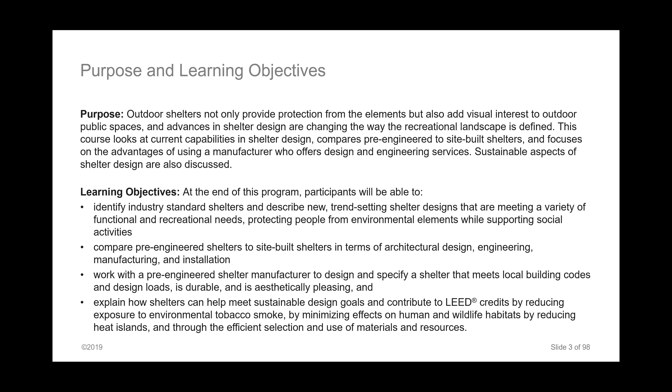This is done by reducing exposure to environmental tobacco smoke, by minimizing effects on human and wildlife habitats through reducing heat islands, and through the efficient selection and use of materials and resources. So we're going to look at some types of shelters.

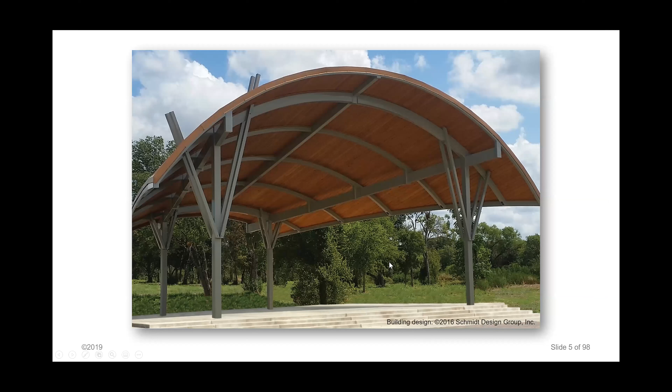A well-designed shelter can be a focal point in an outdoor space, providing a safe, comfortable, and shaded area for the community to gather. Be it a park or playground, athletic field or golf course, or an outdoor market or restaurant, there are shelter solutions available to meet the design and functional goals of the project.

Here you can see a lot of the standard type of shelters that you'll find throughout the market, made by all of the different shelter manufacturers.

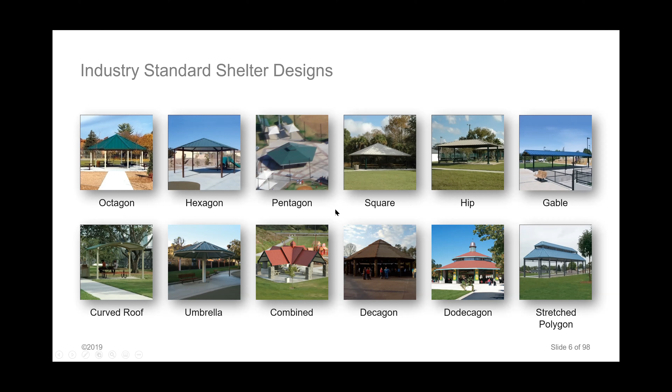Industry standard shelters, as I just showed you, traditional shelters and gazebos grace outdoor spaces across the country. Most shelter manufacturers offer variations of these common shelter types in an array of sizes and materials and a range of prices. But then there are other types of shelters that our company's been working with, and some of the others as well. These are more cutting edge.

While common off-the-shelf standard shelters fit the plan for most recreational settings, innovative ideas, some of which are pictured, have been introduced and are creating trends in park design.

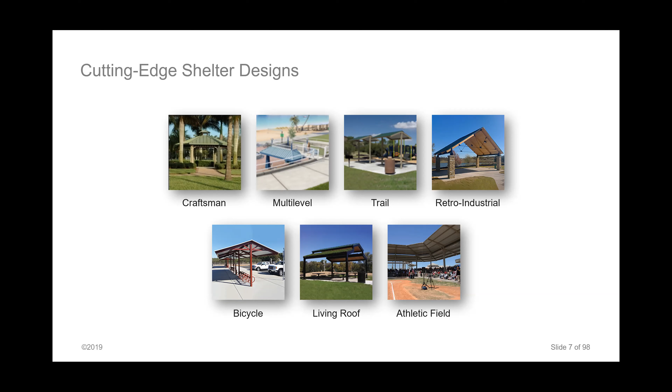A dual pitch shelter has two sloped roof surfaces. A gable roof is a simple dual pitch shelter in that it has two sloped surfaces that create a peak. Other dual pitched roofs are structures where there are two different pitches in a slope or two opposing monoslopes at different roof pitches.

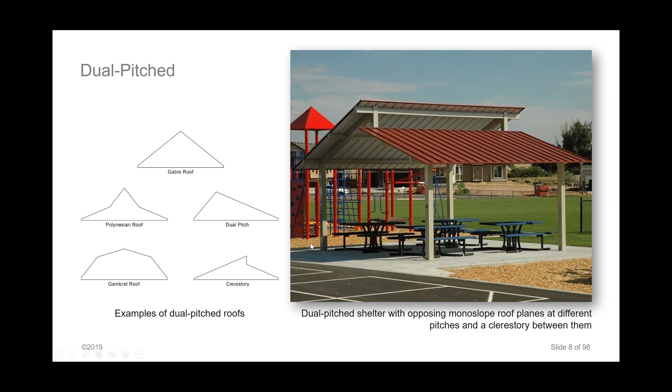According to the Dictionary of Architecture and Construction by McGraw-Hill, 1993, a clerestory is defined as an upper zone of wall pierced with windows that admit light to the center of a lofty room. Clerestory shelters are a variation of that concept in that they have two roof tiers with a sizable space between them that allows light into the center of the structure. These are much like barns and manufacturing buildings that were built with a monitor roof, which is shown at right.

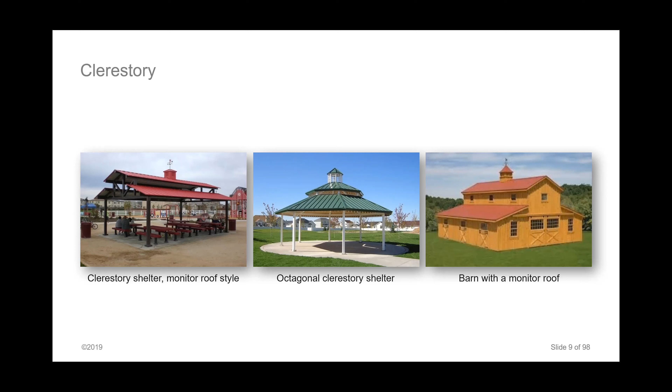A pergola is a garden structure with an open framed roof supported by regularly spaced columns. The definition has broadened to include any structure with a slatted, latticed, or otherwise partially open roof, which also includes garden arbors. They started being produced by pre-engineered steel shelter companies in the 1990s and are available in steel or wood or combinations of both. They can be fitted with fabric canopies to block or diffuse the overhead sunlight.

Living roof shelters combine a green roof product with a steel structure to create a cool and attractive shade space. An engineered roof fascia is designed to work with a modern green roof system. Structures can be fitted with irrigation to keep the green roof healthy and lush.

Flexible water lines can be fed through the steel framing members to the peak of the structure. At the roof, burying the water lines in the soil avoids unsightly lines in young plant trays and reduces the opportunity for vandalism on the system. Drainage is designed into the fascia system and can be taken to grade with a gutter and downspout.

Structures don't always have to only provide shelter, but as seen here, they can provide a view as well. Elevated platform shelters provide another level of usable space, serving as multifunctional structures. They can be fitted with lights, outlets, tables, and seating, and other amenities.

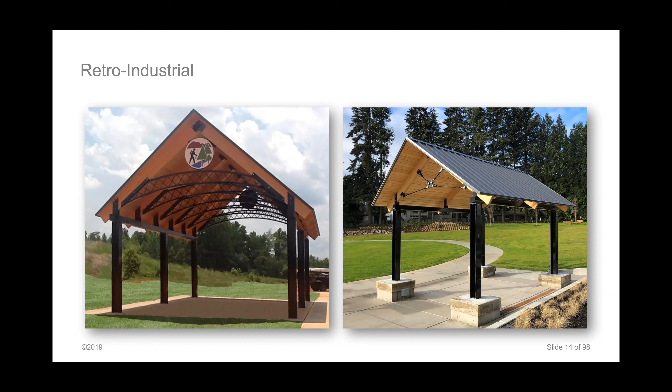Craftsman-style shelters were designed to fit into parks to match that style of architecture present in the homes of the neighborhoods.

In addition to providing shelter, structures can also perform specific functions. Athletic fields provide the opportunity for exercise and socialization in a community. Infrastructure provides protection from environmental elements and can also generate revenue.

The ancient amphitheaters of Greece and Rome are testament to the fact that outdoor theatric presentations have been part of life not only for centuries, but for millennia. Modern stage covers or bandshells continue to be built for outdoor presentations of all kinds. Musical and theatrical performances, public ceremonies, and community meetings are just a few of the uses for bandshells that can be built on flat ground as well as at the base of an amphitheater.

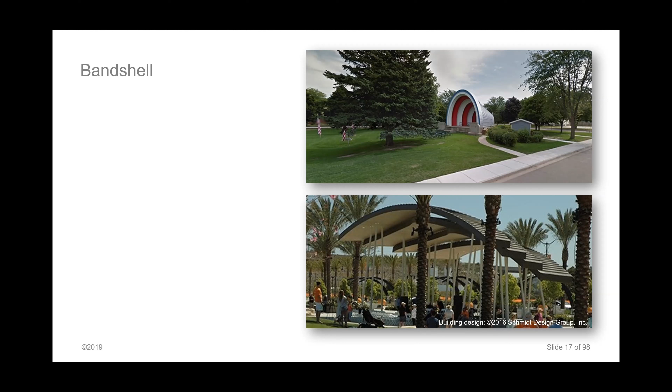The top image shows a bandshell in Campbell Park in Huron, South Dakota. It was constructed in cast concrete and covered with steel roofing, and is an example of early 20th century bandshell design. In contrast, the bottom image is that of a stage cover at Civita Park in San Diego, California, designed by Schmidt Design Group. The park opened in 2017.

Cycling has been enjoyed for nearly 200 years. Bike racks, lockers, and storage buildings have changed over the years to meet the ever-growing needs. Shelters can have attached or freestanding bicycle racks with either horizontal or vertical storage, and can be designed with or without wall enclosures.

Large free-span structures have been used to house carousels. Hexagons, octagons, decagons, and dodecagons in sizes up to 100 feet in diameter have been designed with an elevated eave height and/or a second tier to accommodate the height of the center post of the carousel.

Vented or glazed cupolas and clerestories can help let in light and let out heat. Typically, the shelter manufacturer will provide the frame, roof, and cupola, while the general contractor will provide the walls, windows, and doors.

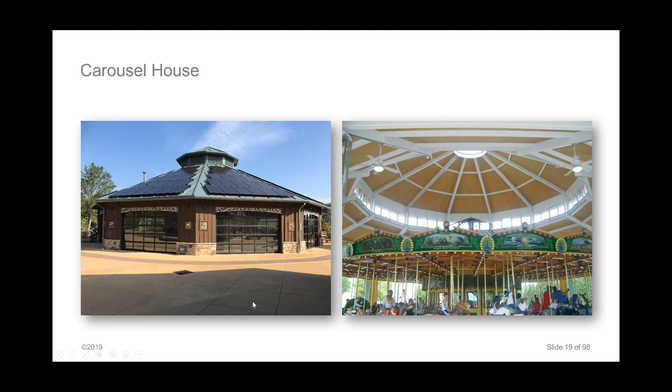Clock towers can accommodate a variety of clock sizes. They can be illuminated and provide automatic time control.

Many shelters are partially enclosed to house restrooms, concessions, and storage areas. Larger shelters can be enclosed for meeting spaces and community activity centers. Wall systems vary, but the most common method of construction is to erect the shelter and build the walls of the structure underneath the roof. Panelized wall systems are available, as well as timber wall systems that go up in the same way that milled log homes are built.

Farmers markets exist in many countries worldwide and offer farmers increased profits over selling to wholesalers, food processors, or large grocery retailers. They reflect the local culture and economy and help to maintain important social ties. Local businesses nearby also benefit from the increased traffic. Many towns and cities erect permanent shelters to house farmers markets, and these structures can also be used for other community activities.

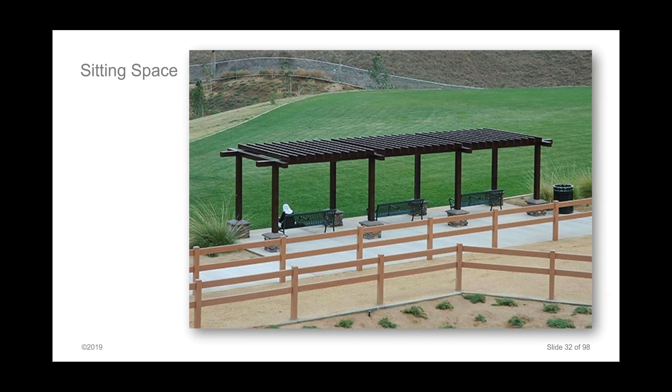Trail systems often need small, inexpensive shelters for waysides.

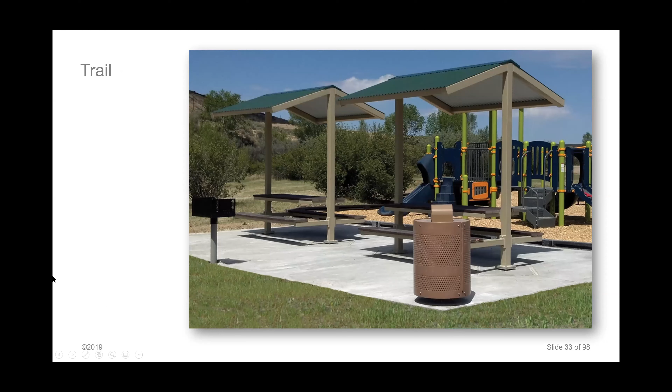One of the applications of open structures is a space for outdoor dining. Restaurants, vineyards, breweries, zoos, sports complexes, and more often offer outdoor seating.

Public fishing areas often provide a location to clean the catch. A small shelter is perfect for covering the fish cleaning station, which protects not only the fishermen, but also the equipment.

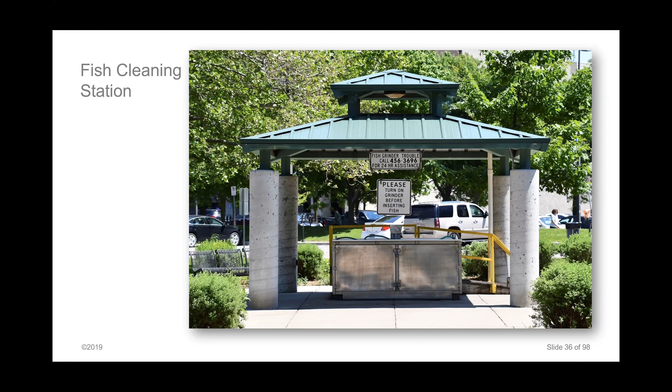So, what is pre-engineered? The term pre-engineered means construction of or employing prefabricated modules, according to the Merriam-Webster Dictionary. The pre-engineered concept started back in the early 60s, but didn't really take off until the 1980s with the metal building industry. Initially, pre-engineered buildings were made from off-the-shelf products that had been pre-designed.

The information was placed in tables for ease of use by the manufacturer. With the evolution of computers, tabulated design charts are no longer needed.

And what are alternatives to pre-engineered? The main alternative to pre-engineered structures are ones that are fabricated in the field from raw stock or site-built. This means that the sections are fabricated or connected in the field, generally utilizing a welded connection, but some site-built shelters can also use bolts.

Because the fabricated parts may be totally fabricated in the field, this has the potential to lead to quality issues. Most of the time, a steel fabricator will be hired to provide the parts fabricated to length.

The local fabricator is normally charged with developing the fabrication prints for the parts under the review of the structural engineer. These are generally two separate companies. The contractor and the design professional are ultimately responsible for the review and final quality of the products. So if the contract is not specific enough, there could be issues in this area, especially in small shelter designs.

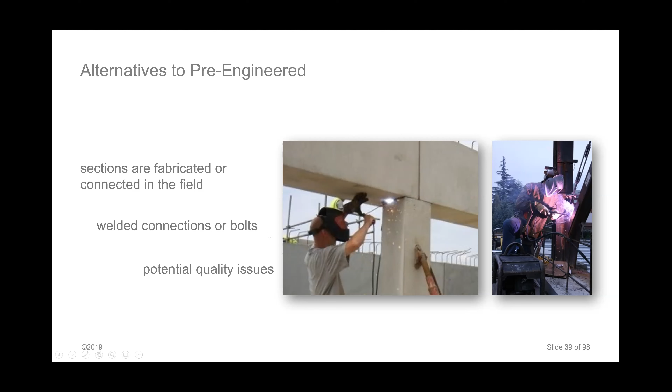Most of the pre-engineered shelter suppliers offer design and engineering capabilities. This design expertise allows for proper proportions and clean lines to be included in the designs, which are not always provided with conventionally framed and site-built structures.

This is applicable for standard offerings and, more importantly, for custom designed projects. The design expertise allows manufacturers to provide valuable insight on different applications for shelters and their locations.

The design services also help landscape architects to stay in control of shelter designs without having to provide all of the design work themselves. Most manufacturers will work with architects, providing design guidance and sketches for projects, and may provide this at little to no charge, a valuable design service for design professionals and their customers.

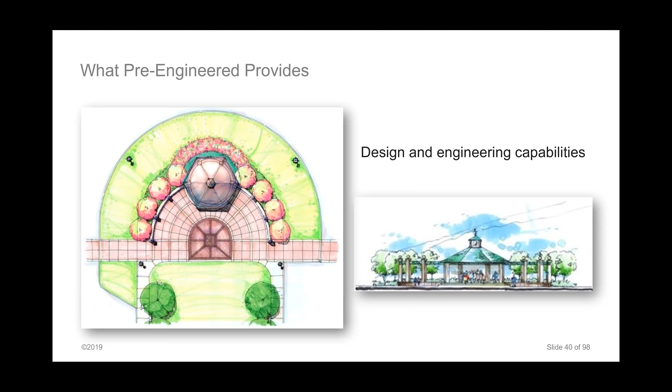The design and engineering functions provided by the pre-engineered supplier mean countless design visions can be realized, such as customized column designs in various formats, customized ornamentation for the project site, different roofing styles, modified roof pitches, accessories such as cupolas, column wraps, and high-end powder-coated finish systems.

The main advantage that a pre-engineered shelter system has over a site-built shelter is that the structure has been designed as a complete system rather than a combination of parts from several sources that are then fabricated to form a completed structure.

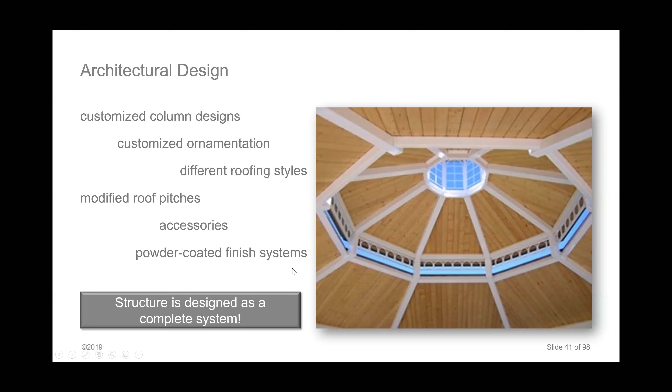The next advantage to using a pre-engineered shelter manufacturer is that they also provide the structural engineering for the created design. The manufacturer will either have an engineer on staff or they will hire an engineering firm to provide the structural engineering required for the specific design, a more expensive option and the only option for site-built structures.

Accomplishing this within the confines of the pre-engineered shelter manufacturer's own facility allows them to provide engineering that is not done in a vacuum. This means that the engineering is done in conjunction with the standard manufacturing practices developed for the products, thereby producing a more cost-effective design. In addition, having an in-house engineer speeds up the process. The engineering is normally done to the specific building code requirements for the project's location.

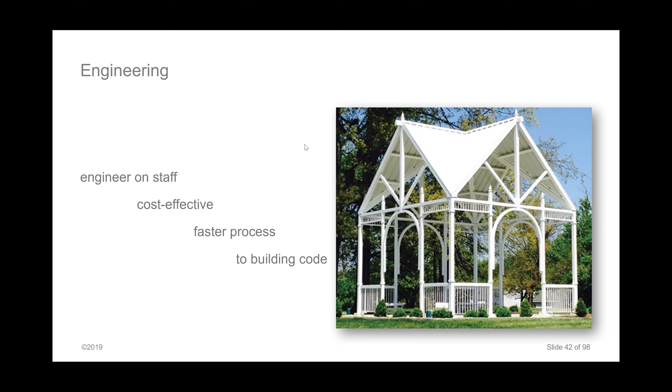In the past, manufacturers would design standards to meet certain loads. Often they had multiple load values for the standards, and a design would be picked that met the local code requirements. This was an inefficient practice, particularly in the use of the members, as some may have been oversized for the project site. Most pre-engineered shelter manufacturers design to the local governing building code for the size of the shelter desired. This is a better use of the steel framing than using pre-designed standards, as you only pay for the amount required.

This method provides a site-specific design for the shelter and its foundation.

Early in the pre-engineered shelter story, some manufacturers stocked certain sizes of shelters. Normal sizing was in 4-foot increments, starting at 12 feet. However, sizes in between the 4-foot increments were considered custom, and additional charges were applied. Currently, most pre-engineered shelter manufacturers have highly automated processes and can fabricate a shelter to any size required. It is possible to design, engineer, and fabricate whatever the budget will allow.

Shelter design is generally considered a standard offering, with many options available for customization, such as column styles and ornamentation. But since everything is engineered and made to order, all items have become standard. With the engineering and design fulfilled by the shelter manufacturer, the fit and finish of the shelters is superior to site-built shelters.

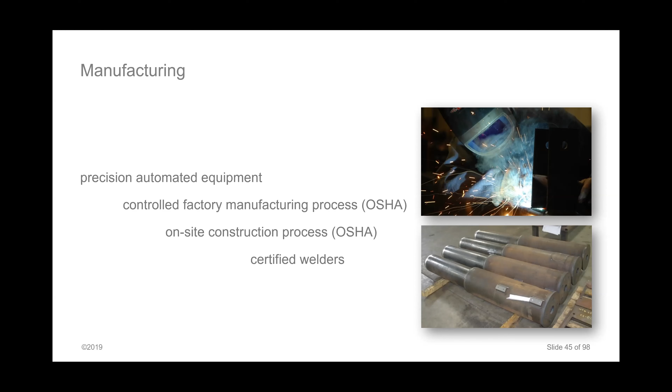A pre-engineered shelter manufacturer should offer precision equipment, automated computer numerical control, to provide the best quality in the shortest amount of time. They should offer a controlled factory manufacturing process and an on-site construction process that follow OSHA requirements for safety, and they offer certified welders.

Pre-engineered shelter manufacturers can provide a high-end factory-applied powder coat finish. Powder coating is a superior finish that cannot be applied in the field and performs better than any site-applied wet coat finish.

Manufacturers may provide corrosion protection through the use of primers applied to clean steel. Some use zinc-rich primers and some use an epoxy e-coat primer, similar to what auto manufacturers use on vehicles. The final color, in the form of a TGIC curing agent, triglycidyl isocyanurate polyester powder coating, is applied over the primer.

The coating is electrostatically applied and then cured onto the steel. A 4 to 6 mils powder coating is typical, with some manufacturers providing a coating thickness of 8 to 12 mils. Mil thickness is a common measurement in manufacturing—a mil is a unit of thickness equal to 1/1000th of an inch.

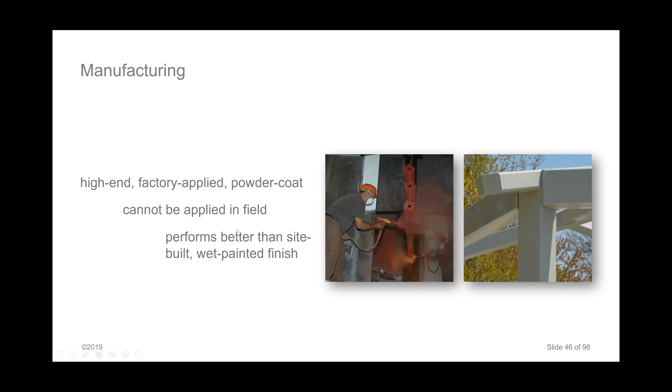With regard to installation, there's a big difference between pre-engineered and site-built structures. Most pre-engineered shelter manufacturers deliver the products banded together for easy shipment to the job site utilizing flatbed truck shipping. All pre-engineered structures utilize bolted connections for the main framing connections. This allows for ease of installation and straight connections. There is no field welding.

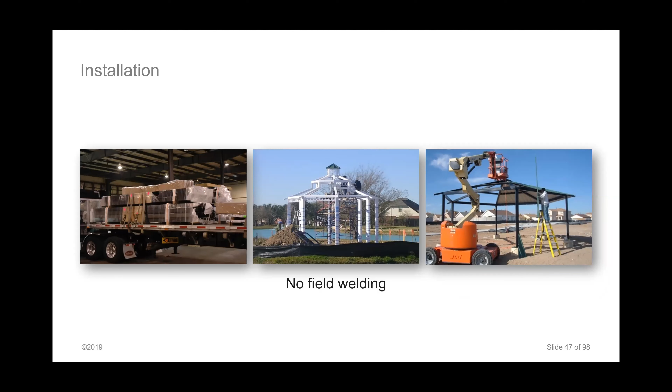All connection plates are fabricated in a quality-controlled factory setting, resulting in great precision in the locations of the holes. The bolted connections and pre-aligned holes afford relatively quick installation of the structural framing. Connections are normally welded for site-built shelters, which requires hiring welders who will have to work up on a lift, usually meaning higher welding costs than those for a factory setting.

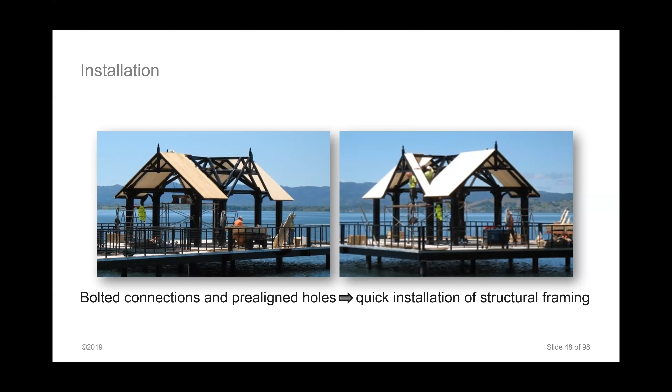Quick structural framing installation means more time can be spent on areas that require more finish work, the roofing and the trim. Manufacturers often provide pre-cut metal roof panels for shelter styles that have hip roofs, which again saves time in the field. The installation crew can install the panels without having to measure and cut them beforehand.

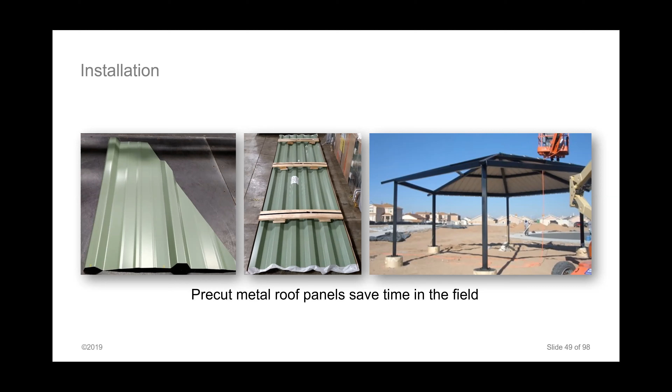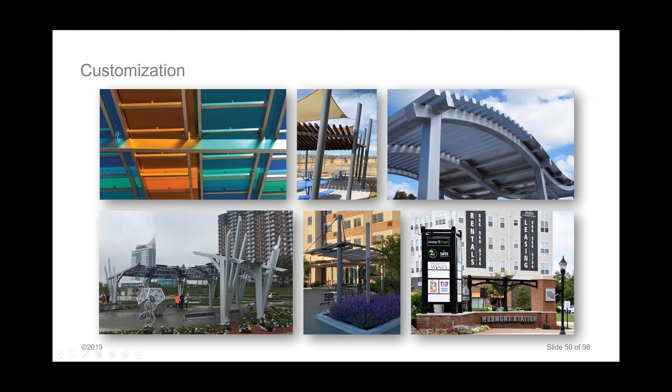So you see colored plexiglass, you see fabric and wood and steel combined, curved members, and all kinds of different settings. And here are some other custom design projects by shelter manufacturers.

Design is how you create a structure that is pleasing to the eye, and engineering makes sure it passes the building code. Without both, the shelter could either be safe and ugly or beautiful and dangerous. Work with a manufacturer who blends design and engineering to create shelters with structural integrity that are pleasing to the eye.

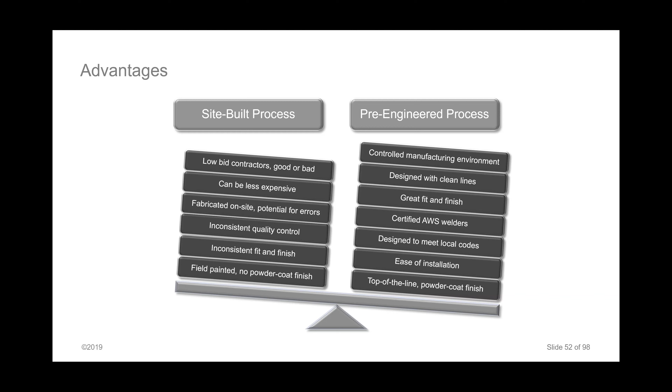And here's our first review question. What is the main advantage that a pre-engineered shelter system has over a site-built shelter?

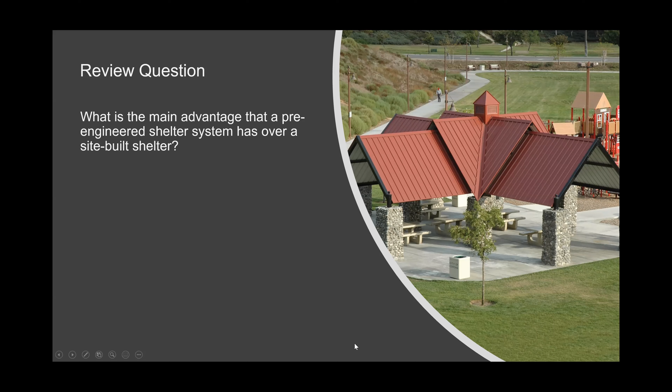The answer: the main advantage is that the pre-engineered shelter structure has been designed as a complete system, rather than a combination of parts from several sources that are then fabricated to form a completed structure.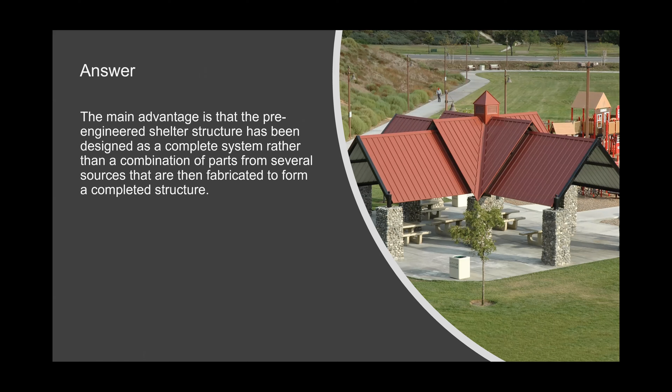Now we'll discuss some of the many elements to consider when designing and engineering a shelter.

There are aspects of good visual design that can be considered relative. Beauty is in the eye of the beholder, after all. Yet there are specific means by which an artist organizes a work of art, and we have those shown here.

The pattern or repetition is the regular arrangement of repeated shapes. Contrast is the juxtaposition of alternating textures or values to highlight their differences. Emphasis is a design element that becomes a focal point. Balance is the arrangement of elements to create the impression of equality in visual weight.

Proportion is the relation between elements with respect to size and quantity. Harmony is the sense that all elements form a coherent whole. And rhythm or movement is the systematic arrangement of elements that drive the eye to the focal point.

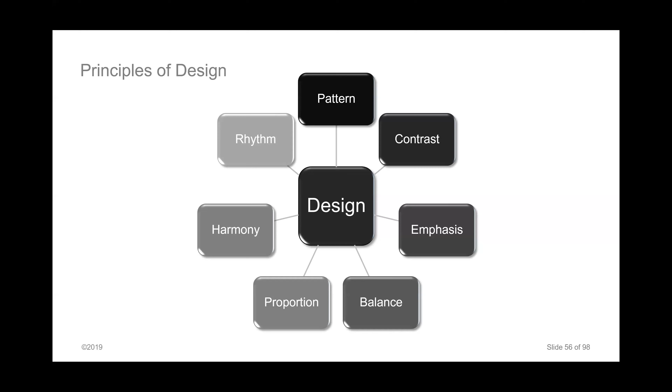These principles of design also come into play when creating an aesthetically pleasing shelter designed to achieve the desired intent, which in most cases is to invite people in.

Proportion and balance: the two elements illustrated in these photographs. In the photo on the left, the overhang on the upper tier is longer than the overhang on the lower tier, giving the shelter a top-heavy look. Also, the visual weight of the roof tier seems to demand larger columns with enough visual weight to carry them. The shelter in the photo on the right demonstrates the correct use of both of those design elements.

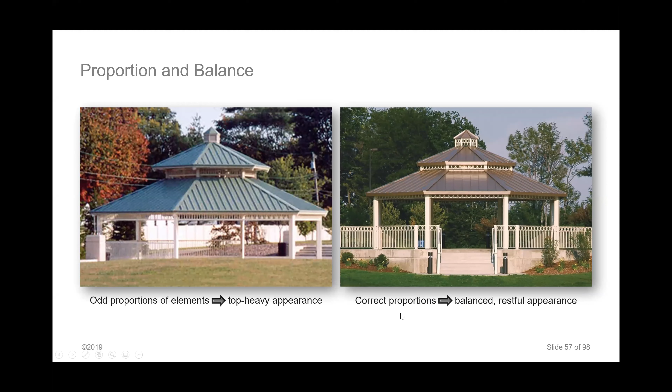Attention to detail is important not only in the design of the shelter, but also in the fabrication of its parts and the care taken during its construction. Fit and finish are important in the overall aesthetic appeal of a structure. Good design includes engineered connections that achieve the overall aesthetic and the required structural integrity.

Skilled fabricators know how to produce parts that fit together tightly to form a unified structure. Trained and licensed contractors are required to install the structure according to the manufacturer's installation instructions. Attention to detail is required from concept to installation to produce a durable and attractive structure that will provide service for decades.

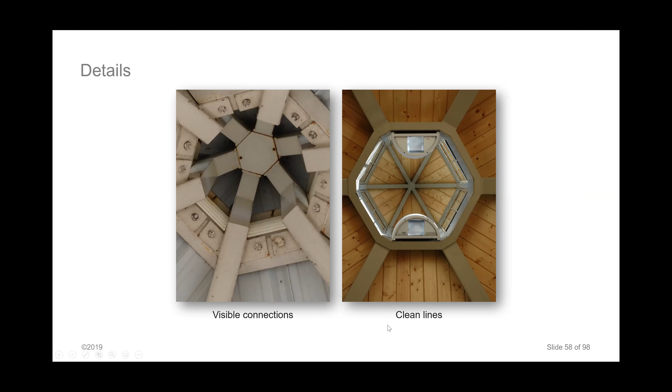There are many options and accessories available to consider. For example, industry standard shelters are available in multiple roof tier configurations. Depending on the manufacturer, 2 tiers are usually available on all shelters, while 3 tiers are available on shelters over 40 feet. The photos show the difference between a vented roof option, which is the top photo, and a clerestory roof option. The clerestory roof option offers the room to install ornamental rails, louvered vents, or windows.

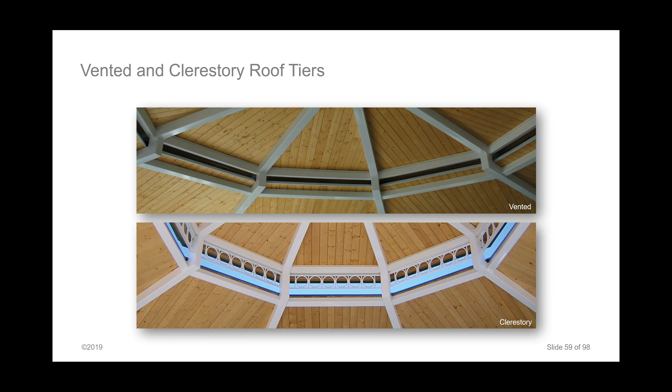Check the manufacturer's offerings for standard and custom designs for options and accessories, such as those pictured, columns and ornamentation, as we discussed earlier.

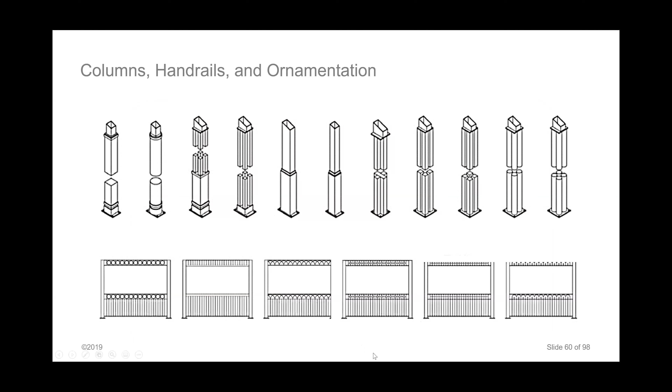Cupolas are available in a wide range of standard sizes and styles. Manufacturers may also offer custom sizes and styles. Weather vanes can be used to adorn the peak of a cupola and should be available in both standard and custom options.

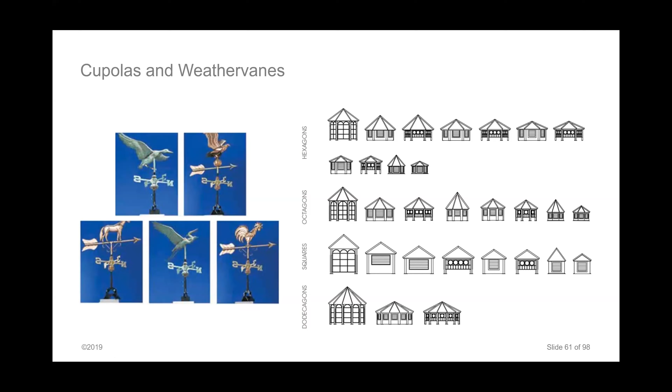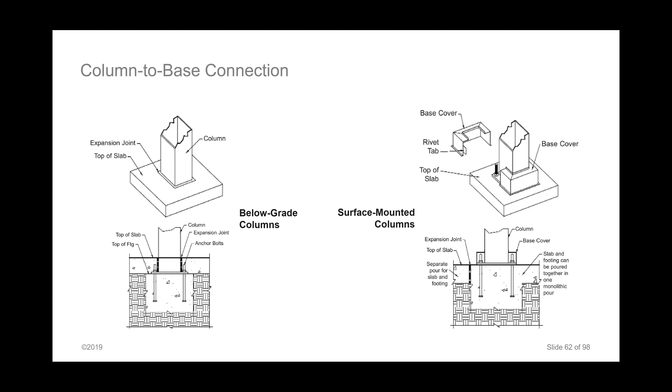Most pre-engineered shelter manufacturers have a standard shelter offering, usually including some version of a square, hexagon, octagon, rectangular gable, rectangular hip, and curved roof rectangles. Other standard products may include gazebo designs, pergolas, mini shelters, and kiosks.

Typically offered in 4 or 6 foot increments with a standard roof pitch, they can now be ordered in 1 foot increments without incurring custom design charges.

Options and accessories, as discussed, can be added to modify the shelter's appearance and function. Eave heights and roof pitches can be raised or lowered to suit the design intent. Benches and wall panels can be added to the frame as required. Manufacturers may offer some type of finish modification, a solar lighting package, or lightning protection.

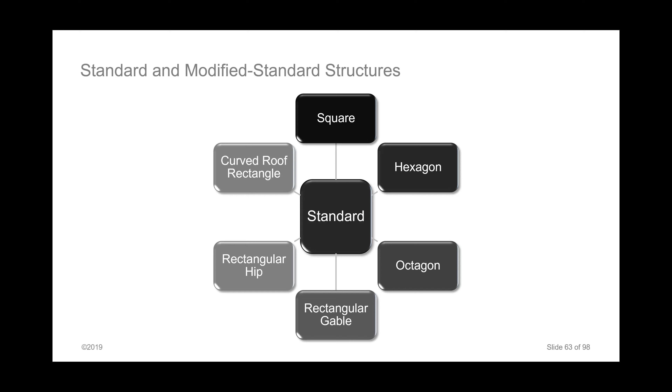One of the questions most often addressed to manufacturers is, do you do custom buildings? Producing custom shelters and other structures requires a certain level of expertise not held by all manufacturers. Be sure to inquire about those capabilities if you approach a manufacturer with a design not found in their product offering. Often with custom structure design, it is best to involve the manufacturer's design and engineering personnel in the early stages of design in order to achieve the greatest cost savings.

A standard roof option is 24 gauge Galvalume roof panels with a PVDF resin coating, such as Kynar 500. Ribbed panels can be pre-cut by the manufacturer and may require minor field adjustments for proper fit. Standing seam roofing is another option and may be supplied uncut to be cut in the field by the installer. Matching trim and 26 gauge Galvalume and fasteners may also be provided by the manufacturer.

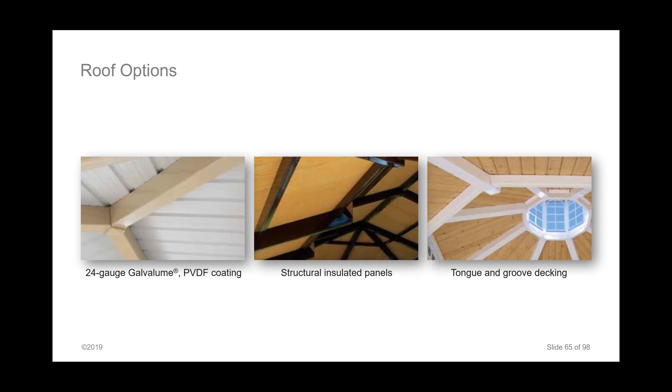And on the right, 2x6 and 2x8 tongue and groove decking are also used, with the most common species being southern yellow pine, western red cedar, and western lodgepole pine.

Shelters with structural insulated panel or tongue and groove roof decks require finished roofing materials. While this can be any roofing material available to the building trades, most manufacturers offer pre-cut painted metal, steel, or aluminum roofing panels in a variety of rolled configurations, such as ribbed panel, corrugated, standing seam, and others.

Also offered are shingle packages in fiberglass or sawn cedar, as well as tile roofing in a variety of styles.

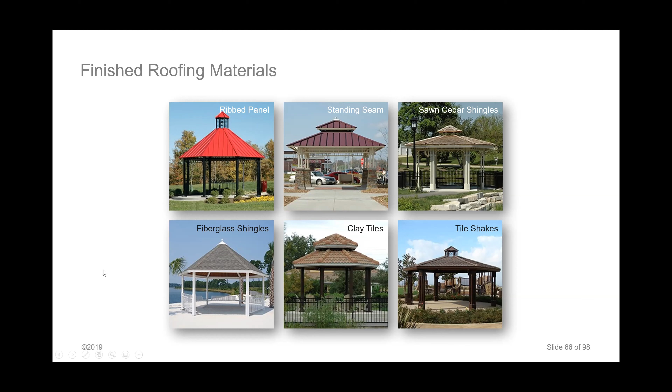For steel finishes, you can get prime painted finishes that are factory priming that protects the steel components from corrosion throughout the shipping and erection process. The steel is cleaned to remove loose mill scale, loose rust, loose paint, and other loose detrimental foreign matter. The clean steel will then be prime painted with a quick dry, lead and chromate-free alkyd primer. Finish painting in the field is required.

For hot dip galvanized finishes, the process produces a zinc coating on steel products by immersion of the material in a bath of molten zinc metal. The steel to be coated is first cleaned to remove all oils, greases, soils, mill scale, and rust. Because galvanized steel requires no maintenance for decades, its use in public construction is an efficient use of public funds.

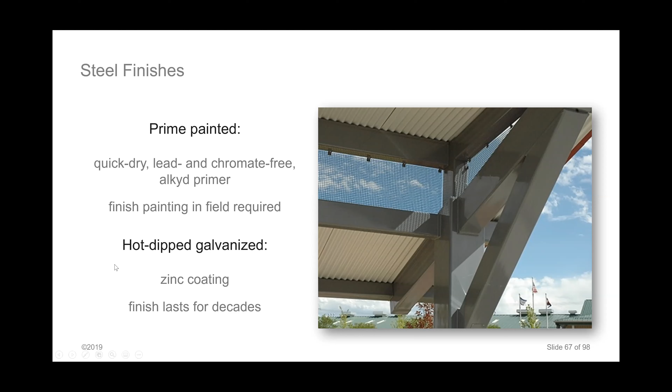The E-coat and powder coat finish is a premier steel coating and is a combination of liquid epoxy primer and 2 coats of TGIC polyester powder coating. The process has 5 steps. First, the steel is shot blasted to the specification of SSPC SP10, shot blasted to near white condition, removing all oil residue, mill scale, weld spatter, and slag.

The steel is then immersed in zinc phosphate in an 8-stage pretreatment process. Then it is immersed in an electrostatically applied liquid epoxy and coated to a uniform 0.7 to 0.9 mils. This E-coat totally encapsulates the part, preventing rust.

Following that, a double coat of TGIC polyester powder is applied, 1 coat of color, and 1 clear coating for a final finish that is 8 to 12 mils thick. Finally, all materials are inspected to meet 100% coating, proper cure, film thickness, and impact resistance.

In highly corrosive environments such as coastal areas, a hot-dipped zinc galvanizing prior to applying a finish coat is recommended. This may produce a slightly rougher finish once coated, but will provide added protection against corrosion.

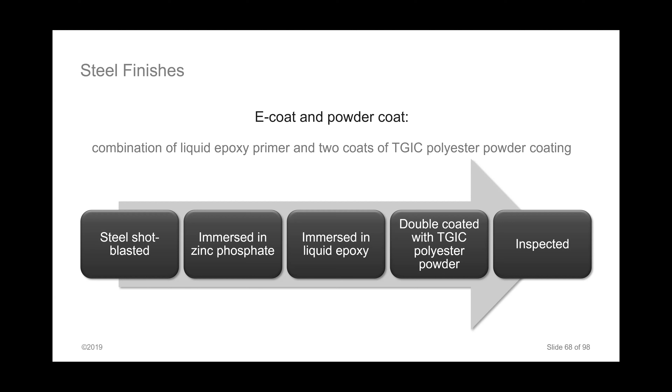Under engineering considerations, design must meet the local building code requirements where the shelter will be installed. There are a number of building design loads to consider.

Dead load is the total weight of the structure's installed components. Collateral load is additional dead load applied to the structure, accounting for additional items that will be attached to the structure, such as sprinklers and lighting. This is in addition to the dead load.

Live load is the minimum downward acting load that a shelter must be designed for per the local building codes, 20 pounds per square foot.

Ground snow load is the amount of snow that will accumulate on the ground, specified by the local building department or ground snow load maps for the area. This is used to determine the roof snow load, which is the downward acting force on the shelter's roof determined by a percentage of the ground snow load that will accumulate on the roof.

Wind loads include both lateral and uplift load. Lateral, or racking load, is the horizontal load that pushes and pulls on the structure based on the wind's direction. Uplift load is created when wind flows over the roof and under the roof on an open structure. The flowing over the roof creates suction or uplift on the roof, and the flowing under the roof creates upward pressure on the bottom of the roof. Essentially, open shelters are like large airplane wings.

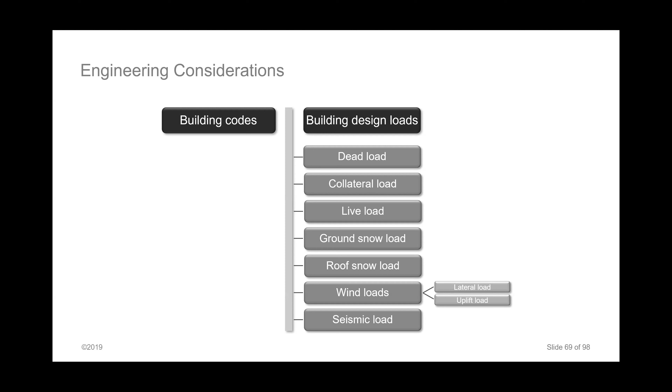All connections used in the structure are designed to be bolted together using high-strength A325 bolts. Connections are made in such a manner that the bolts cannot be seen once the connection is fully tightened.

A permit is required from the local building department before installation of the foundation, and the subsequent installation of the structure itself can begin. The permit is granted once the engineering calculations and drawings for the structure are reviewed and approved by the building department.

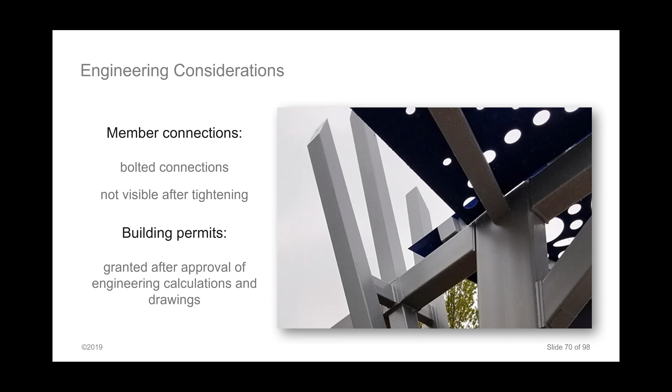Our second review question: what type of finish is recommended for highly corrosive environments?

You can hear the dun, dun, dun in the back.

In highly corrosive environments such as coastal areas, a hot-dipped zinc galvanizing prior to applying a final finish is recommended. This may produce a slightly rougher finish once coated, but will provide added protection against corrosion.

And now we'll look at how the design process works.

In the initial consultation, you will research shelter products and manufacturers and formulate a design concept. The architect or designer can meet with a shelter manufacturer, or may even be able to submit an online quote request.

The manufacturer will typically require information such as the project name, the project location by zip code, and shelter information, which is the minimum information needed: style, size, roof type, roof pitch, and any additional information such as drawings, specs, sketches, or custom components. A quote can be given if an existing design meets the project design criteria.

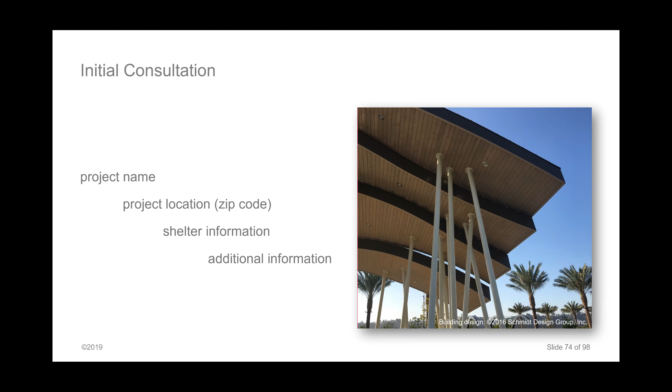If no design exists that meets all the criteria, the manufacturer will perform calculations based on the criteria and create the design. They will create a preliminary drawing, develop a material takeoff list of materials with quantities and types, such as specific grades of steel required to build the structure, and create a preliminary footing design.

Preliminary engineering involves reviewing the building information, searching for design loads based on zip code, creating a wireframe, selecting member sizes and anchor layout, and sending to detailers for drawings.

Once engineering, drawing, material takeoff, and footing design have been completed, a quote can be supplied. If revisions are required, the process is repeated until the design is approved and the final quote is given.

Why is that not changing? Oh, okay.

Final engineering typically comes when there's an order, and that involves retrieving the building design loads from the governing local entity, creating the model, selecting member sizes and design connections, reviewing the soils report if provided and designing footings, and then sending back to the detailers.

A 3D model of the shelter is created and used to formulate a submittal package with design information, foundation detail, member and bolt sizes, and connection details for the frame and roofing. Typically, a review is done by another detailer, and a final review is done by the engineer. The submittal package is then sent for approval.

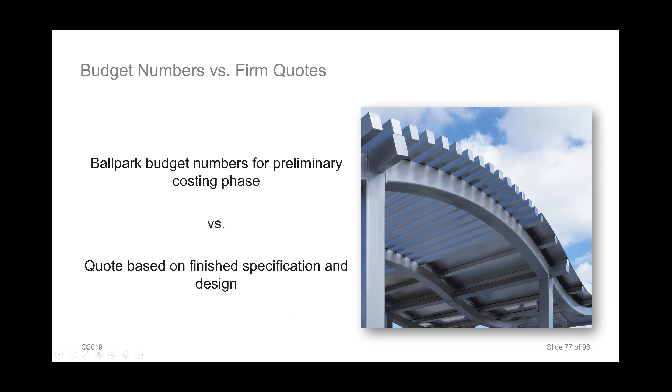Manufacturers typically provide some form of specification that can be used in the bid documents for a new project. One of the most widely used specification systems in the US and Canada is MasterFormat, published by Construction Specifications Institute (CSI) and Construction Specifications Canada (CSC).

Once the submittal is approved and the fabrication process begins, it will take about 8 to 10 weeks. Anchor bolts can often be shipped within 1 week after fabrication approval is received. For fabrication print development, a 3D model is used to create fabrication submittal prints for approval. Once the submittals are approved, the model is used to create individual part prints for each subassembly part included in the model. The fabricator will detail tube, plate, and fastener sizes, create roof and trim kits, and count fasteners for both the frame and roofing. A bill of materials is created and a final review is performed before releasing the print to fabrication.

The fabricator will perform material takeoffs, create a cut list, check inventory for stock, send order lists to purchasing, and schedule each step of the manufacturing process with assigned completion dates. For frame finishing, steel frame components are finished according to the order, E-coated, powder coated, prime painted, or galvanized, which takes about 10 working days.

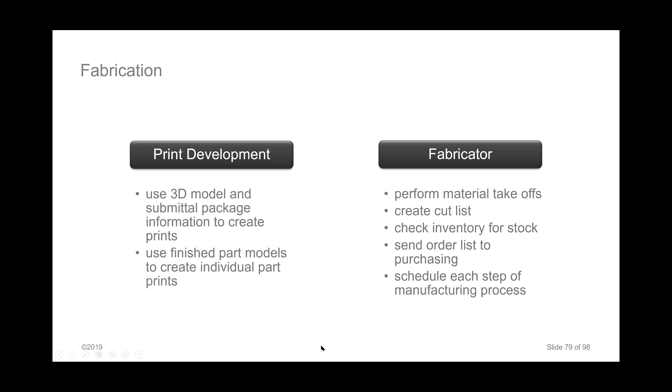Once the frame components are finished, a shipping date is arranged, the materials are delivered to the job site, and installation can begin. Most manufacturers' representatives are either licensed contractors themselves or work regularly with one or more contractors who can perform the installation of a shelter structure.

Specifications normally state that the installer is to be experienced in the building trades. They can include excavation, concrete foundation and flat work, steel or wood frame erection, carpentry, roofing, masonry, and sheet metal work. Construction timelines vary from project to project. Typically, a 30-foot shelter can be erected on finished footings by a 3-person crew in less than a week.

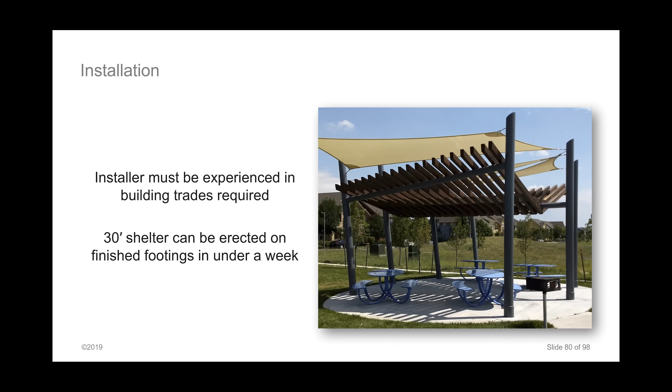So how can shelters fit into green design practices? Design and construction practices that significantly reduce or eliminate the negative impact of buildings on the environment and building occupants are called green or sustainable design. Loosely defined, green building is a collection of land use, building design, and construction strategies designed to protect the environment, reduce energy consumption, and promote occupant health. The goal of sustainable design is the development of high-performance buildings that improve local and global communities.

Shelters can contribute to the sustainable design objectives of a landscape project. The following slides outline their potential contributions to projects seeking LEED certification.

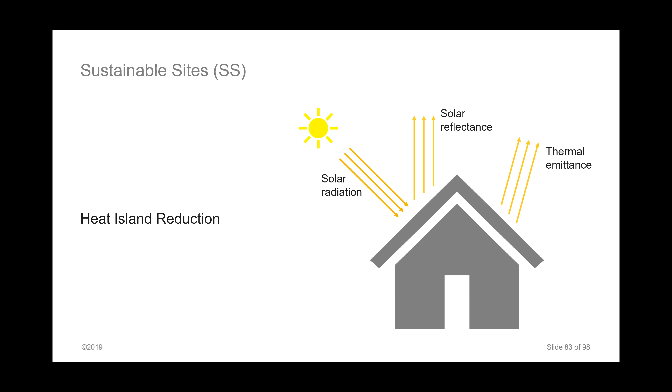The intent of the Renewable Energy Production Credit is to reduce the environmental and economic harms associated with fossil fuel energy by increasing self-supply of renewable energy. It requires the use of renewable energy systems to offset building energy costs. Shelter roofing materials can have integrated solar panels for energy production.

The intent of the Building Product Disclosure and Optimization Sourcing of Raw Materials Credit is to encourage the use of products and materials for which life cycle information is available and that have environmentally, economically, and socially preferable life cycle impacts, and to reward project teams for selecting products verified to have been extracted or sourced in a responsible manner.

Under option 1, leadership extraction practices, wood products must be certified by the Forest Stewardship Council or USGBC approved equivalent. Recycled content is the sum of post-consumer recycled content plus half the pre-consumer recycled content, based on cost. Wood shelter products can be supplied with FSC certification.

Steel is the world's most recycled material. The primary steel frames for a shelter can be made from recycled scrap generated from both consumer and industrial users. On a weighted average, this accounts for roughly half of the steel used in a typical shelter.

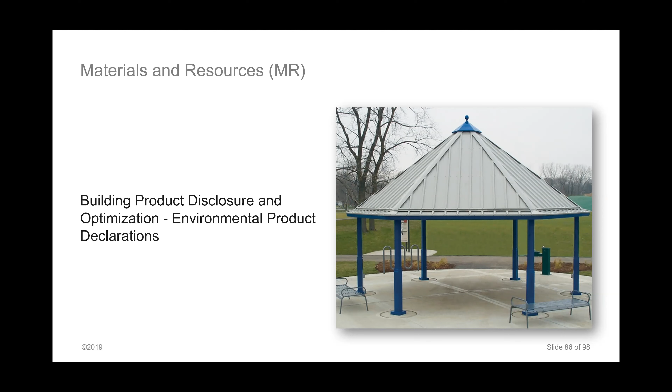The intent of the Construction and Demolition Waste Management Credit is to reduce construction and demolition waste disposed of in landfills and incineration facilities by recovering, reusing, and recycling materials. The requirement is to recycle and/or salvage non-hazardous construction and demolition materials. Calculations can be by weight or volume, but must be consistent throughout.

There are 2 paths under option 1, diversion. Path 1: divert at least 50% of the total construction and demolition material; diverted materials must include at least 3 material streams. Path 2: divert at least 75% of the total construction and demolition material; diverted materials must include at least 4 material streams.

Scrap material from shelter construction, as well as the packaging materials, can all be recycled.

The intent of the Environmental Tobacco Smoke Control Credit is to prevent or minimize exposure of building occupants, indoor surfaces, and ventilation air distribution systems to environmental tobacco smoke. The requirements are to prohibit smoking outside the building except in designated smoking areas, located at least 25 feet from all entries, outdoor air intakes, and operable windows, and to prohibit smoking outside the property line in spaces used for business purposes.

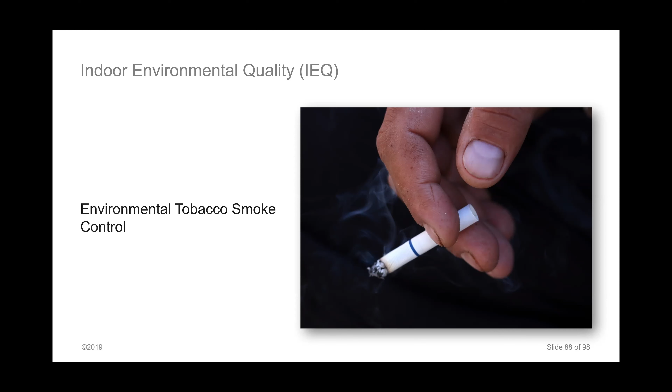In our last review question, how can shelters contribute to the LEED Sustainable Sites Heat Island Reduction Credit?

The answer is by using cool metal roofing or cool roofs, the heat island effect is reduced, which minimizes the impact on microclimate and human and wildlife habitat. Shelters are available that have metal roofing that meets the Solar Reflectance Index criteria for LEED and for the Energy Star Certified Roof Products program. Shelters are also available with vegetated roofing.

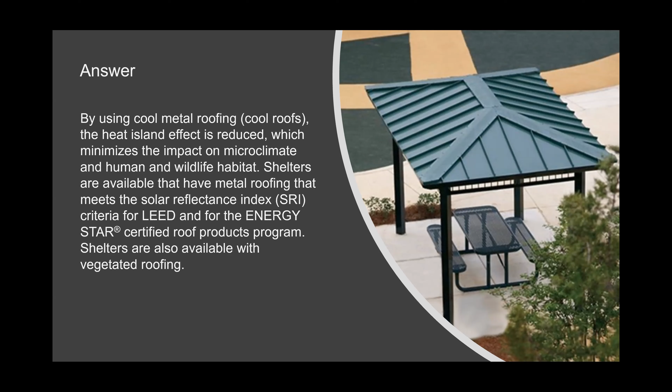And so we'll conclude with a few project profiles.

This project was initiated by the Rotary Club of Windsor 1918 in a request to the city of Windsor to help celebrate their 100th anniversary of service in that city. In August of 2016, the city of Windsor approved the intent for a plaza with sitting areas to provide shade for users of the Windsor Riverwalk at the Civic Terrace.

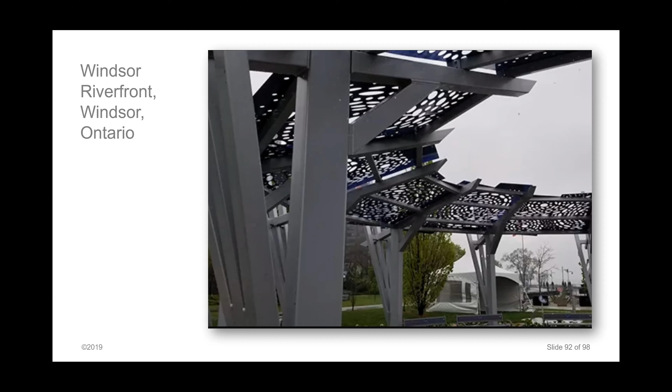The circular layout of the structure emulates the rotary wheel as deconstructed and reconstructed to symbolize the future of the Rotary organization. The trellis lies on the axis of the Civic Esplanade from City Hall at the south to the Detroit River. Looking up at the roof panels, one is reminded of Vincent van Gogh's painting, Starry Night. The roof panels are misaligned to indicate the future is never a predictable entity.

To lighten the structure, the columns were designed to arc outward to make the plaza space feel more open to the air. About the columns, the project designer Stefan Fidjuk said, "In honor of the First Nations who settled along the Bending River, today known as the Detroit River, the backsides of the columns form a series of tridents to symbolize the Ojibwe, Ottawa, and Potawatomi, who make up the people of the Three Fires. At night, the tridents are illuminated from the base to further appear like fires, burning as a symbol of the people of the Three Fires."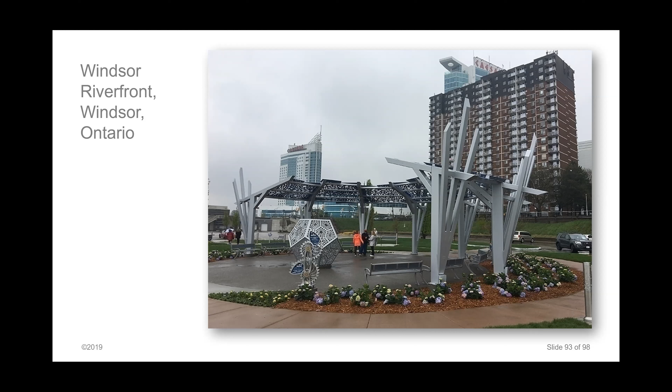And our final project, in 2015, the city of Aurora, Illinois, demolished a high school that had been built in 1905. They planted grass in the open space and deeded the property to the Fox Valley Park District in 2016. In the summer of 2017, construction of the new Blackhawk Park commenced on the old school property. The park was designed by Todd Stanton of Design Perspectives, Inc. of Naperville, Illinois.

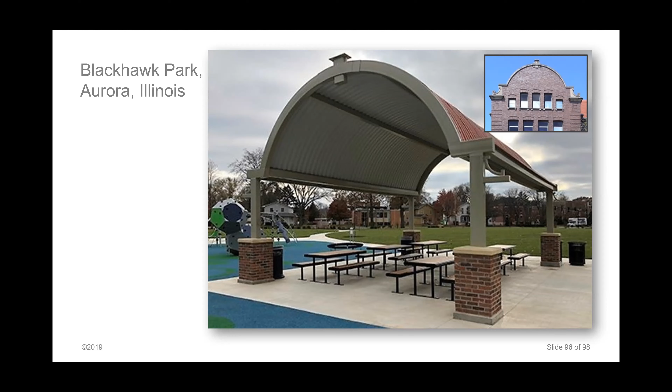In keeping with the wishes of the Park District's planners, one of the park's new amenities was a 22-foot by 30-foot curved roof shelter, which was intended as a throwback to the original school design, which you can see in the upper right-hand. Says the landscape architect who sketched the concept, the custom roof line of the shelter was inspired by the unique elevation of the old school that once graced the site.

The design of the shelter was directly tied into the historic cues of the old school with the center keystone feature and decorative scroll accent end pieces. The shelter pillar bases were built by local masons using reclaimed brick salvaged from the old school that further enhanced the historic value of the overall design. The collaboration between the Park District planners, consulting landscape architects, and the manufacturer designers created a focal point for the new park based on a piece of history truly special to the residents of Aurora.

And so that is the end of our presentation. And I saw Sean taking a lot of notes. So I guess, Lauren, if you want to take back over.